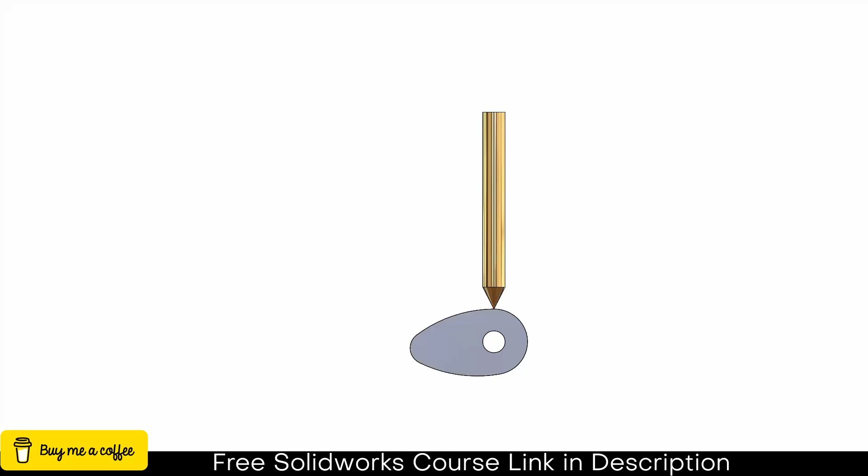Namaste guys, in this video we are going to learn how to make this camshaft mechanism in SolidWorks.

So let's start. As you can see, I'm in assembly mode and I'm going to make all my parts here. So click on insert components, new part, select the front plane. Press Ctrl plus 8 for normal to the view. Now I will draw some circles like this. Press escape. Now try this. By pressing Ctrl select this point, make it coincident.

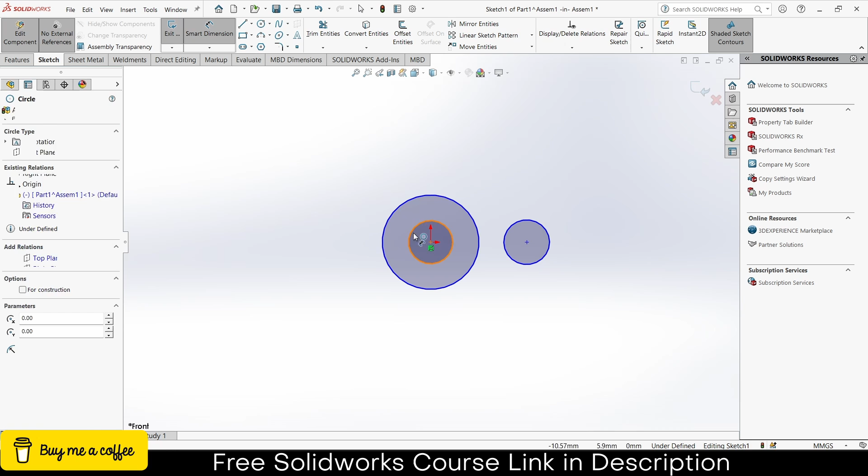Now give them some smart dimensions. This is 10, this is 30, this is 15, this is 30. Escape. Select this point by pressing Ctrl. Select this point. Make it horizontal. Click on 3-point arc.

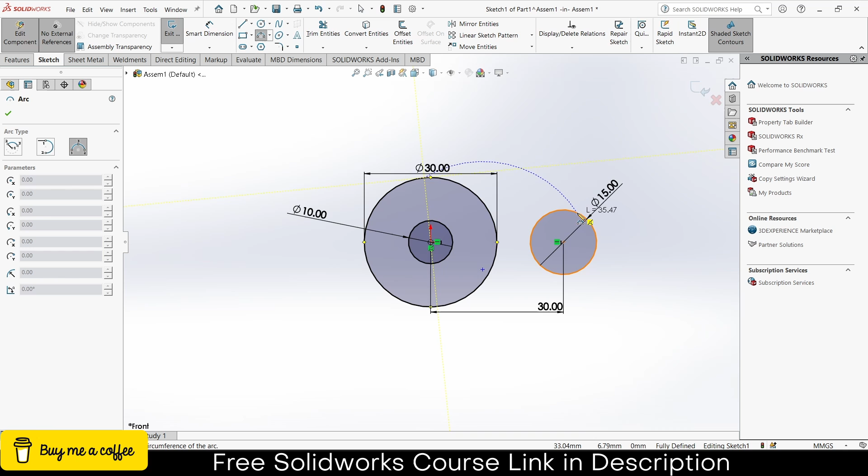Escape. Now what you have to do is select this and select this line. Make it tangential. Repeat the step here. Make sure it is tangential properly, else when you try to do mating parts, it will not work. Click on mirror entities. Select this line. I want to mirror about this line. Click OK. Click on trim entities. Trim this line.

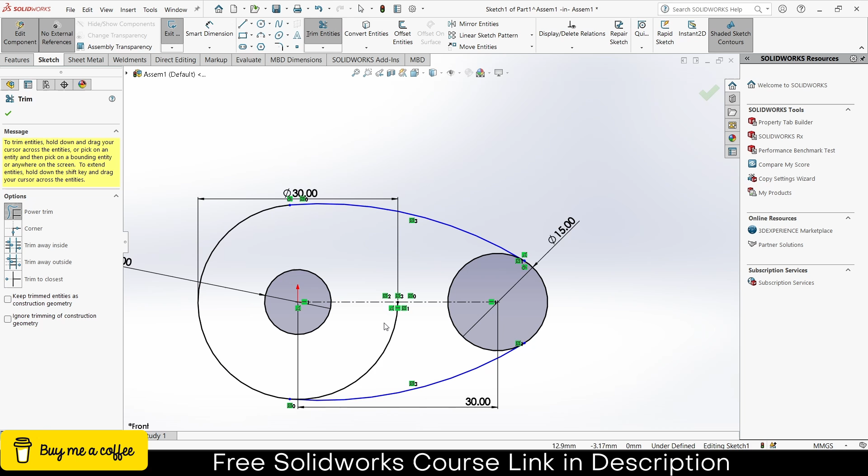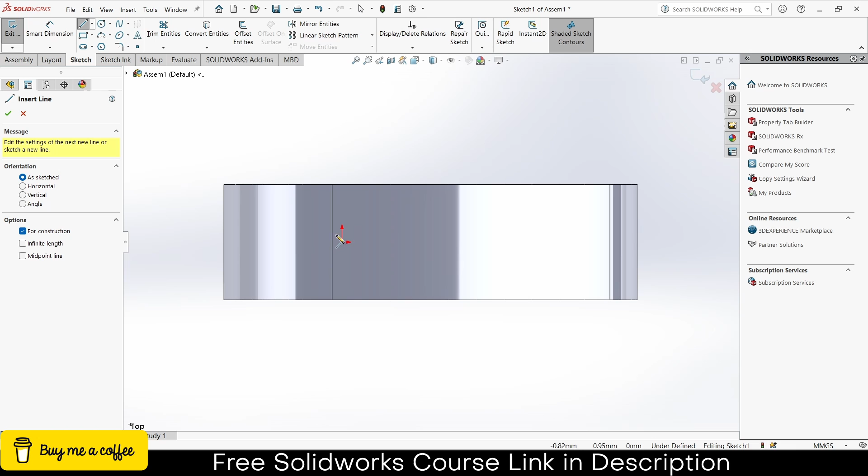Go to the features, extrude boss base. Click on the mid plane. Enter the thickness as per your requirement. In my case 15 mm is fine. Click OK. Now exit the edit component mode. Select the top plane of the assembly. Remember, from the assembly, click on here, click on center line. Draw the center line. Press escape. Exit the sketch mode.

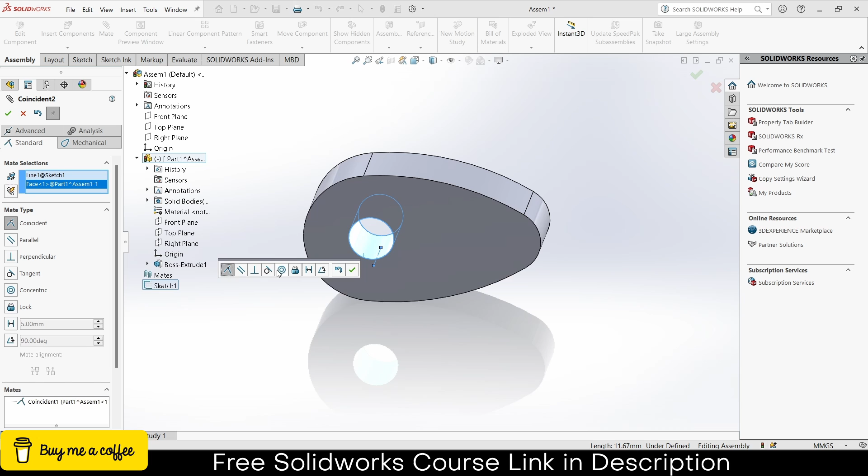Select the front plane of the part and front plane of the assembly. Click OK. Select this line and select this. Make sure it's coincident. Click OK. Now what I've done is, now it can only rotate. I can't move this in these directions or up and down. So this is the purpose of the mate and this line coincident mate. Okay.

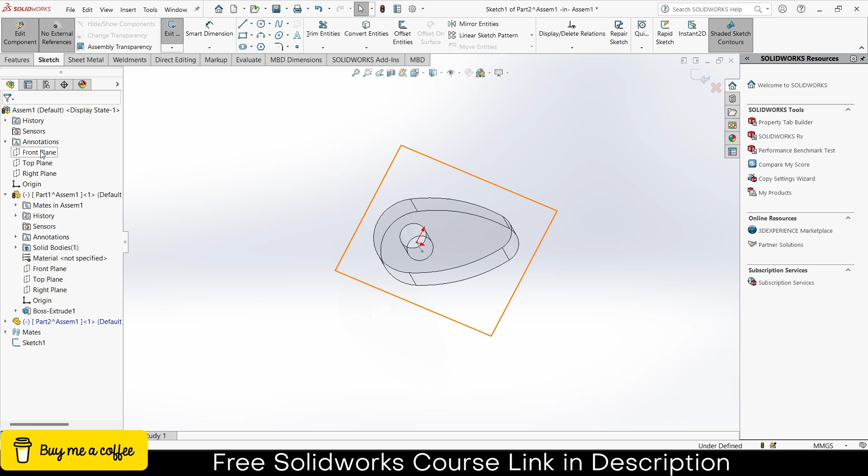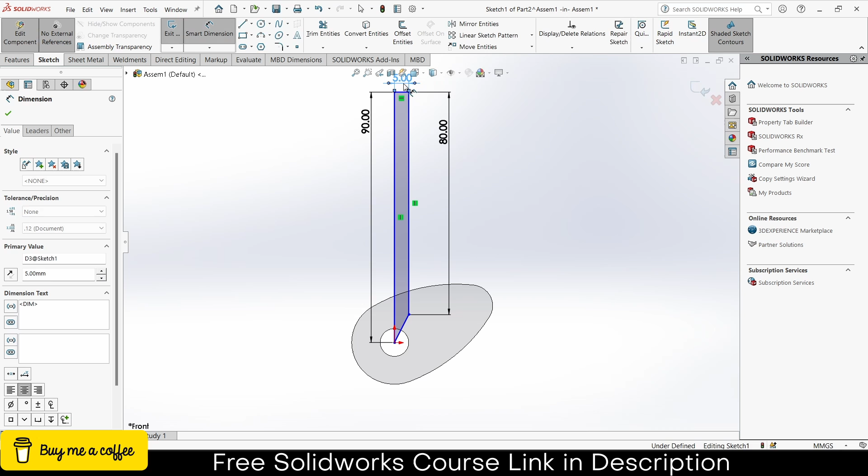Now I need one more part, that is the follower. So let's make it. Click on here, new part, select the front plane, press Ctrl plus 8 for normal to the view. So what I will do, make like this and give it dimensions 90, 80, 5. Okay, extrude boss base. Now make sure that you draw, in the front plane, a single point, because I'm going to use this point later on. Now exit sketch mode and edit component mode.

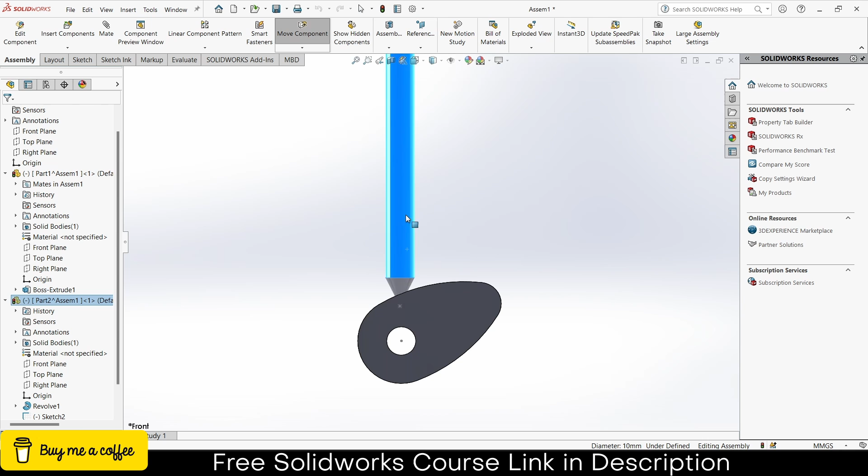Notice it can move in unwanted directions. I don't want it. So I select the front plane, click on sketch, draw a center line. The purpose of this center line is to make sure that this follower only moves, oscillates up and down, nothing else. So go to the mates, select this and this line, make sure it's concentric, click OK. And one more thing, I need to make sure that it doesn't rotate. So I will select the front plane, click on mate and select the front plane of the assembly, click OK.

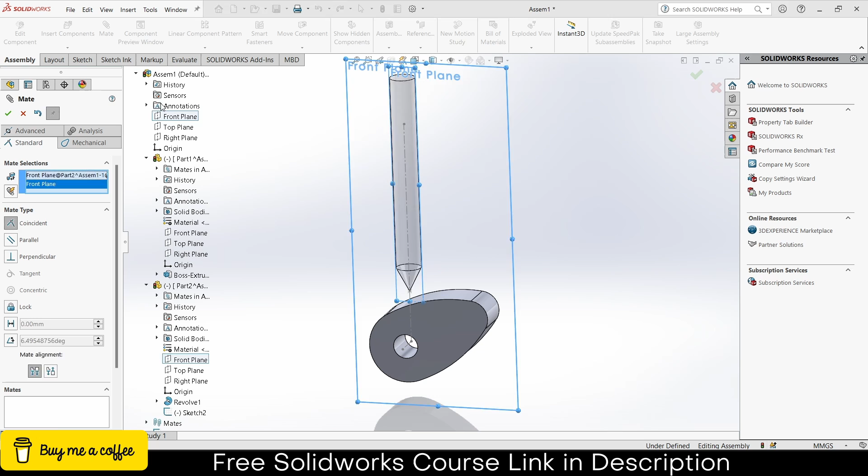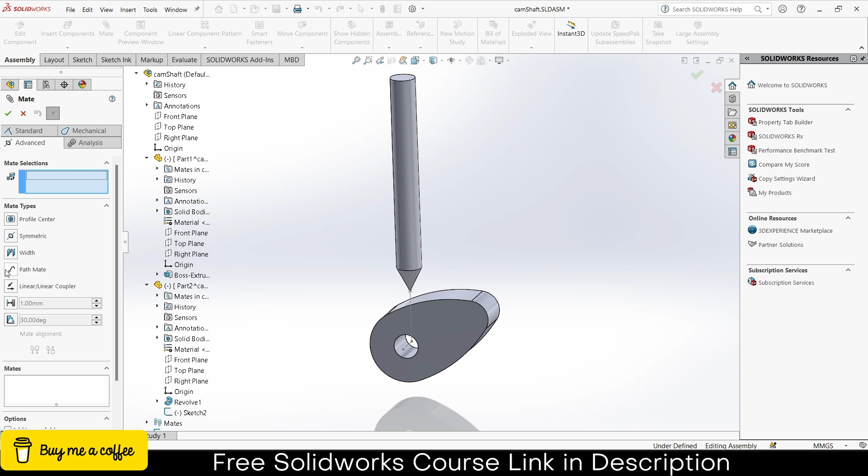Now first save all these things. Camshaft. Now I will create a path. So select this part, click on edit component and I will select the front plane, click on sketch, select this face, click on convert entities, exit the sketch mode, exit the edit component mode.

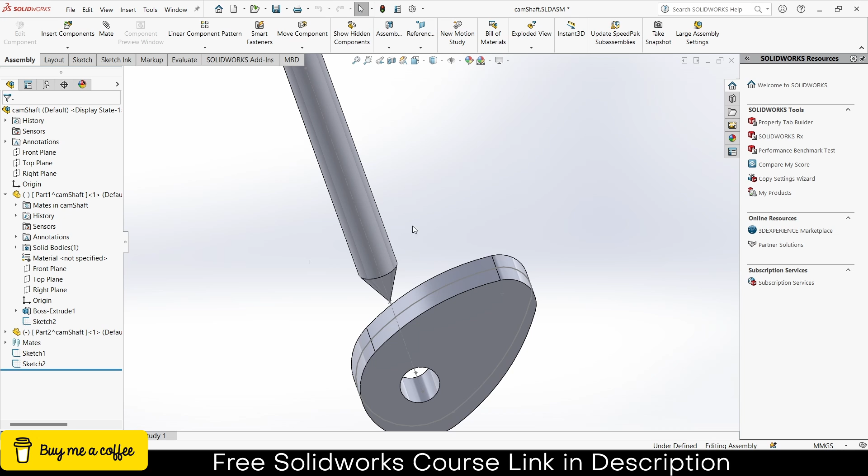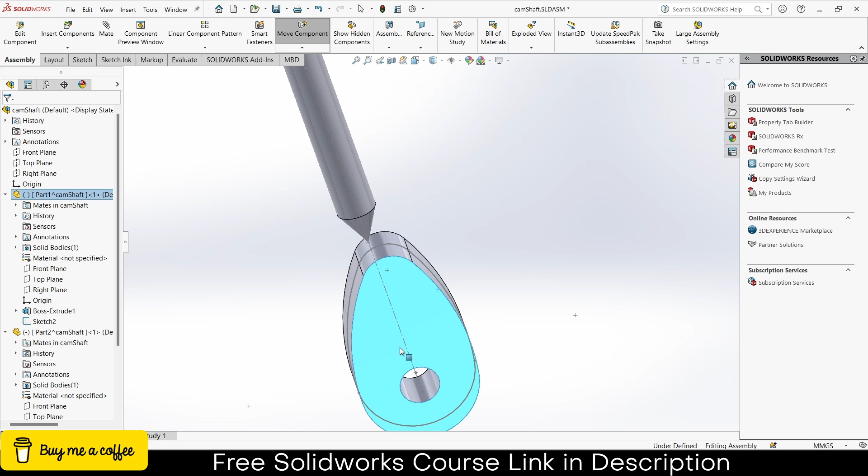Now go to the mates, click on standard, make it coincident, select this point and select this line. Okay, let's see how it goes. Not the way I want. Hmm.

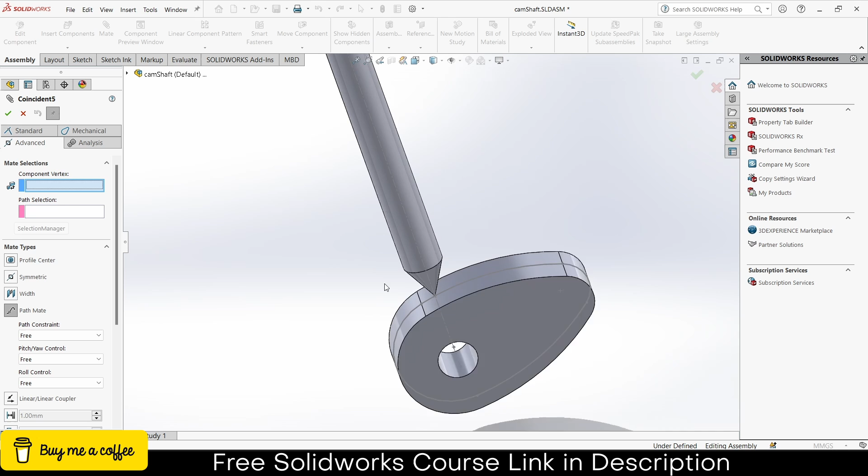Clear selections. So I will use something called path mate. Component vertex, select this point, and path selection. Click on selection manager. Click on here, loop. Select this. Click OK. Click close and notice it is working fine now. Now let's try to do the animation.

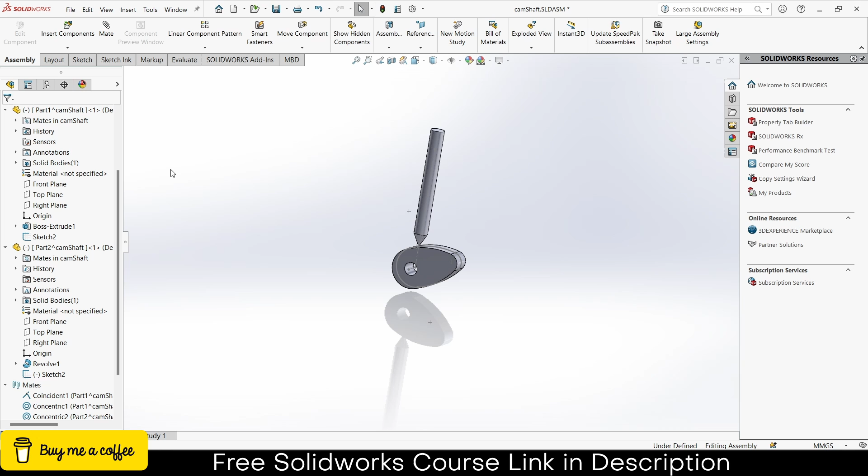Some people might wonder why I am not using the cam mate. I tried to use it, but for some reason SolidWorks is crashing a lot. I don't know why. I tried 5 times, but unfortunately it doesn't work for me. So how can I do the animation?

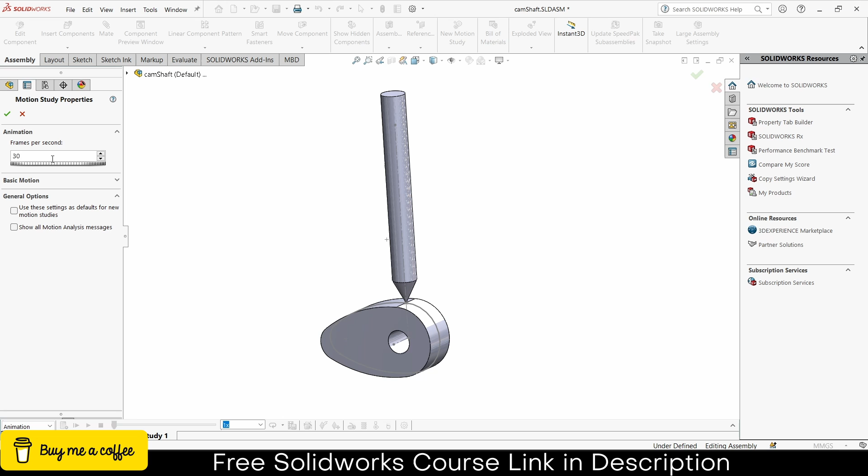It's quite simple. All you have to do is go to the motion study, click on here, motor, select this face, enter the value of RPM as per your requirement. 20 RPM is fine. Increase the FPS rate. 30 FPS is good. This video is going to record at 24 FPS, so I will make it 24 FPS. Select this face, press Ctrl plus 8. Click on this eye to hide all the unwanted sketches. And let's zoom out. Click on calculate. Let's do one more thing.

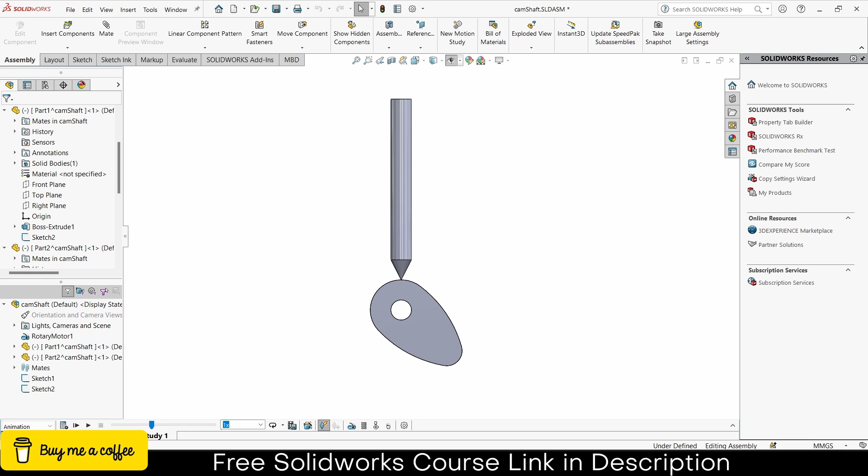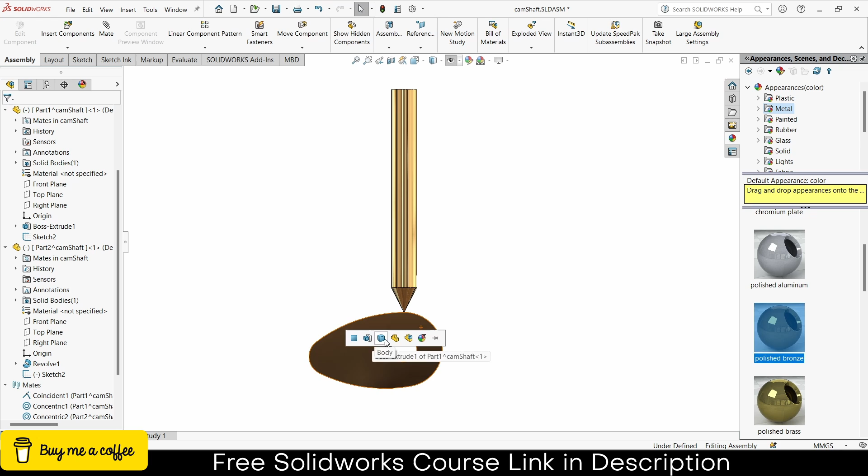Now click on calculate. You can see how it looks. If you want, you can add some color or material to it. It's up to you. Let's add some polished gold. Looks good. And shiny galvanized. Eh, doesn't look that good. Polished bronze. No. Polished steel. Chromium plate. Okay, this looks fine. So let's try to do the animation again.

So I will click on play and you can see how it looks. So this is just a simple animation to show how to make a simple camshaft animation in SolidWorks. I hope you guys learned something from this video.